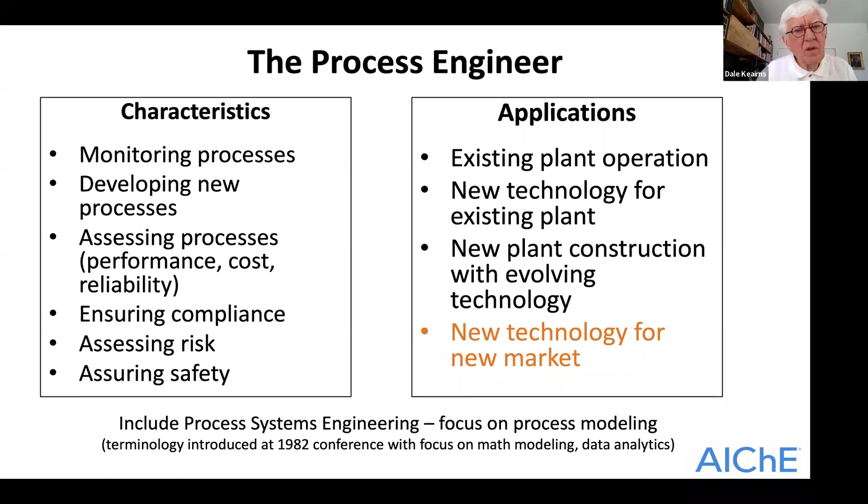And then the next visual. Can we go to the, thanks, Michelle.

So kind of some comments on the evolution of process boundaries. So on the left axis there, I have the scale, all the way from molecular, all the way to looking at global systems, and as a function of time. So back in 1900, AIChE was formed in 1908. And if you look at the presentations at that initial meeting, basically focused on equipment, what we now call unit operations as well. And that was the focus and the scope that we had at that time.

During the 1950s, the focus was really on the plant. In my undergraduate days, we used Max Peters' Plant Design and Economics for Chemical Engineers, a book from 1958. The inside figure when you opened that book was this plant, and the whole book focused on technical and economic analysis centered on the plant. Since that time, we've expanded the scope of where we draw process boundaries, so that we're now looking at everything from the micro, molecular level all the way up to enterprise systems and large, complicated systems.

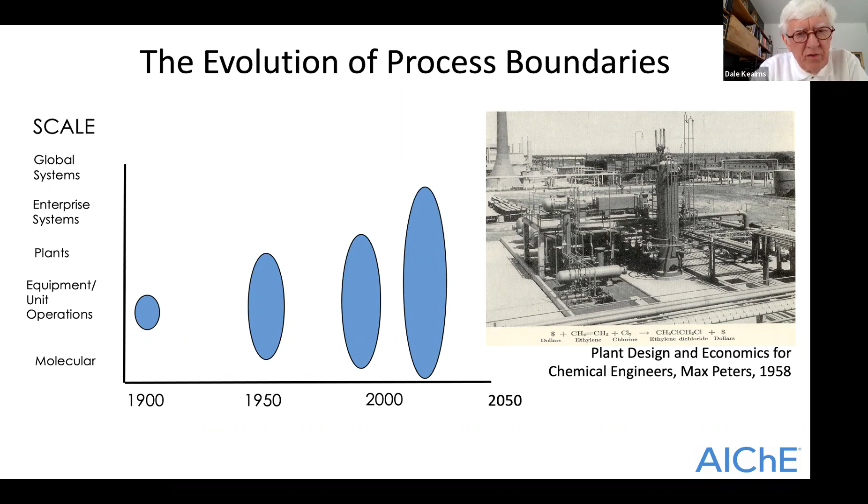If we go to the next visual, I had a couple examples, and there's a number we could pick. This happens to be on ice manufacturing, and I see this as an example of where we're responding to technology. This is ice production by time from about 1870 up to 1940. Between 1900 and 1920, there were about 25 million tons of natural ice still harvested, which was the primary source before that, and about the same amount produced as plant ice, manufactured ice. But there were a lot of considerations with weather, ice famines, and concerns with polluted lakes.

Ice from the Hudson River was really unsafe. The Natural Ice Association of America was formed during this time to promote the benefits of natural ice. You can go back and look at the literature, and think about the changes we're currently undergoing — we have the same kind of transitions occurring.

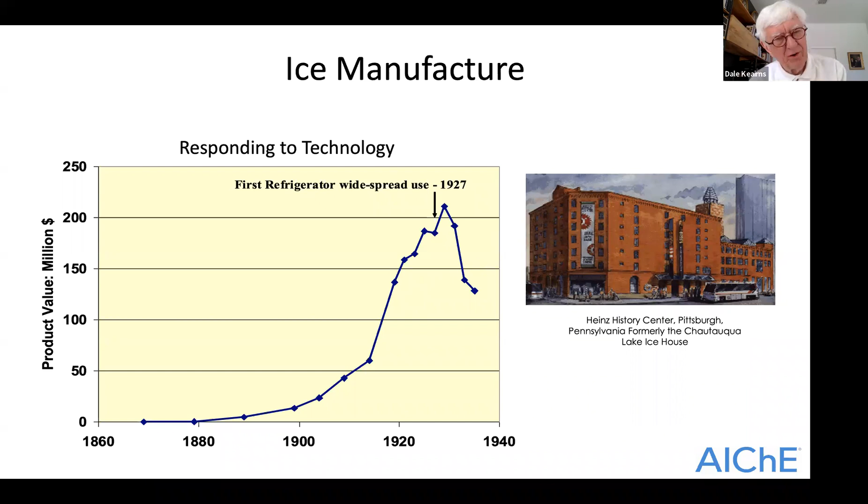If we go to the next visual, this is a case of refrigeration efficiency, where we're responding to regulations. I have three lines on this chart, with the time frame roughly 1950 to 2000. The green line is the refrigerator price, the blue line is the energy use per unit of cooling, and the red line is the refrigerator size in cubic feet.

In the early 1970s, we had regulations focused on driving improved refrigerator efficiency, and as a result, we see a significant reduction over time in energy use per unit. We also see that the price went down. One consideration we encounter today is people who resist regulations, arguing that environmental or other concerns will increase the price. That's not necessarily the situation, as we can see — yet the size of refrigerators continued to increase, and certainly didn't decrease as a result. I think it's another example of the role of technology and its connection to society and communities, which we'll talk about a bit later.

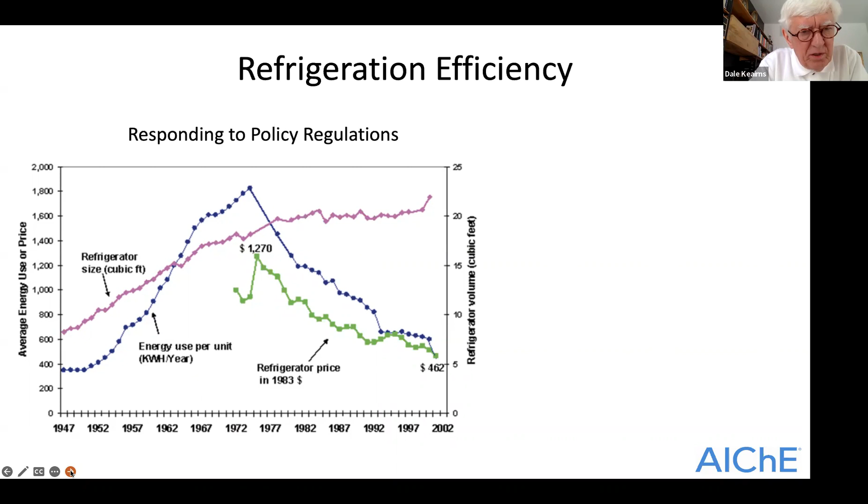The next visual illustrates what I see as one of the real challenges we have: the food challenge and responding to new paradigms. We have an enormous amount of wasted food, and what we call the food cold chain — pre-cooling, cold storage, refrigerated trucks, chilled market shelves, etc.

We really need to reinvent this, and it's going to require more than just refrigeration in this case. It's another example, and we have many of these types of examples that we're dealing with today. So these are just a couple of historical perspectives before we go into the other areas on the next slide.

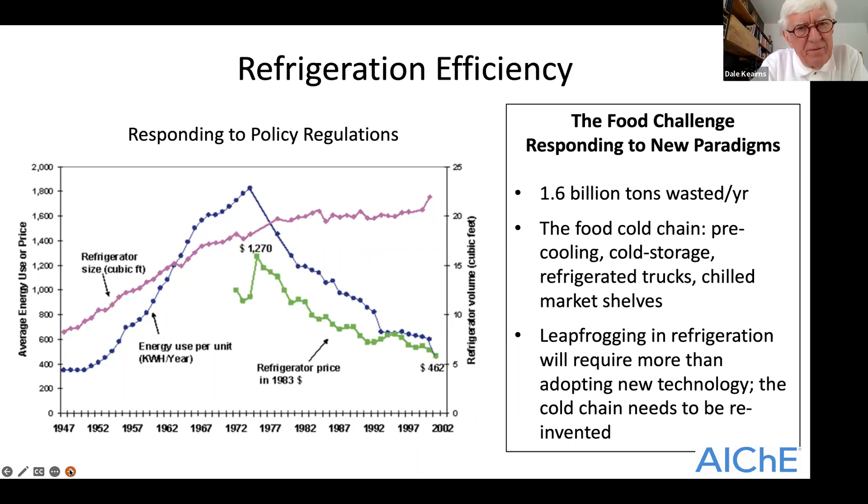Changed process boundaries. As I mentioned, originally we were in this blue box where we were largely, as chemical engineers, focused on process and product. We designed a plant, we built it, we operated it, a manufacturing process. But today we're really needing to deal with the whole integrated system: resources, the process, environmental, sustainability, societal, safety, infrastructure. And so the boundaries have changed over these 50, 60 years, if you will.

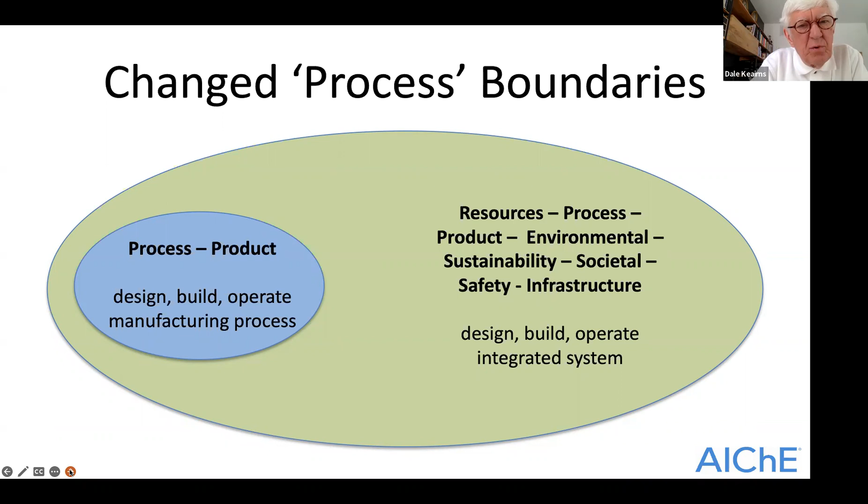The next visual then is looking at the components of this integrated system analysis. Certainly there's the technology, which is traditionally a focus that we've had. Resources have also been a focus for many of us. Materials, the supply chain, the workforce, the organization associated with those resources, the externalities, and the end user in the market.

If we go to the next visual, I want to then spend some time on techno-economic analysis, where we are really interested in looking at performance, capital cost, operating and maintenance cost, uncertainties, risks, and the time frame is important. And all of this is so important in terms of informing research and development and informing investments in technology.

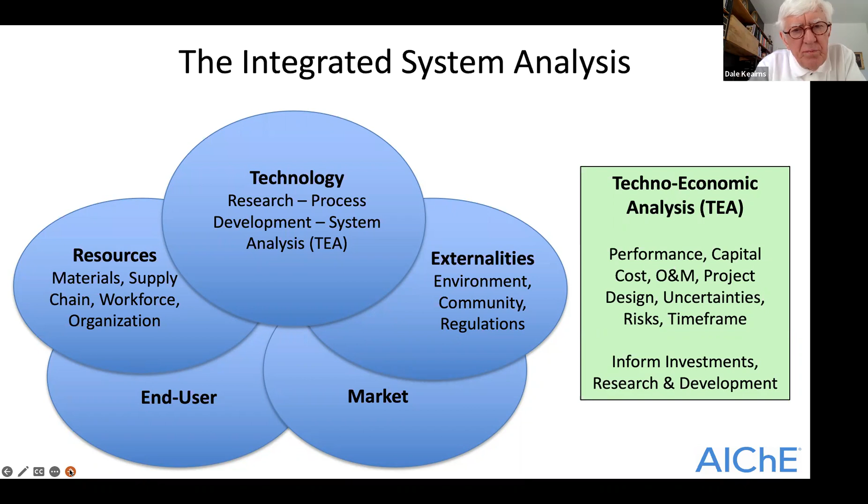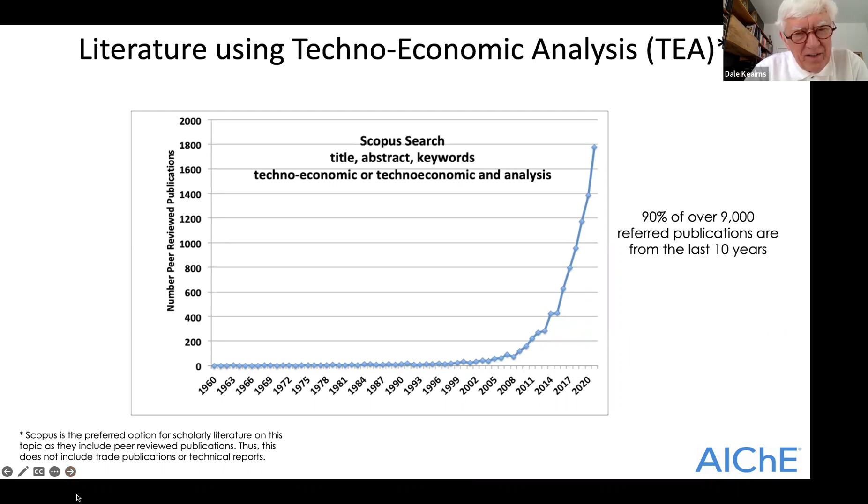Next visual. So technology maturity is extremely important, and many of you are engaged, I'm sure, with this whole space, and I welcome our exchanges on this. So there's technology readiness level, which is used, and many of you are very familiar with this ranking, all the way from a concept, TRL1, up to where a technology is commercial. But frequently, the system integration readiness level, and the interconnected readiness levels, are not really addressed effectively. And I consider these to be extremely important when we're looking at new systems.

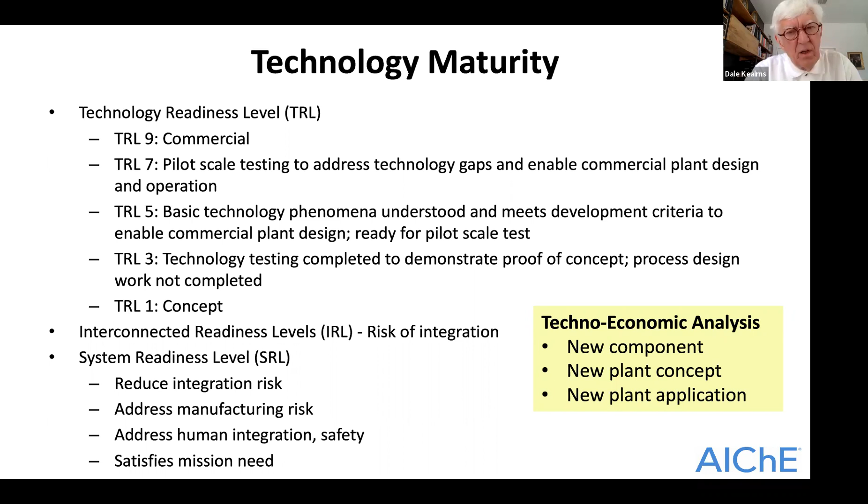And even if we're looking at a new component, many times the integration of that component into an existing plant or a new plant is not seriously considered. So there are techno-economic analyses for new components, for new plant concepts, and for a whole new application system, if you will. So if we go to the next slide, what I've done here is...

These are kind of the status, the understanding that we would have with the status of a technology. And they're sort of listed in the order from a concept level all the way to where we're interested in more of the commercial product, if you will. So, do we have test results? Do we have data analysis for this new technology, do they exist? And all of these are the things that are important in carrying out a techno-economic analysis.

Does an integrated process flow diagram exist? Frequently, we're presented with a cartoon of a simple box that assumes a great deal of assumptions in it. But eventually, we as process engineers are really engaged in putting together a process flow diagram. Does a process equipment and system configuration exist? One can have a flow diagram, but one really needs some configuration information. Are the interface requirements for a novel process defined? Do the novel equipment design concepts exist? Frequently, we have black boxes, but are very limited in terms of a design concept.

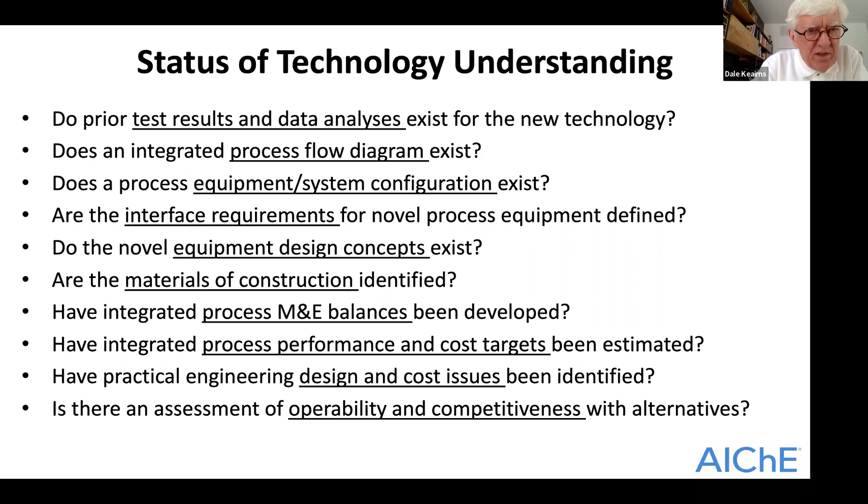One can do a techno-economic analysis with any of this level of information, but they are a very different techno-economic analysis. And what we see, and DOE has done this as well, we see guidelines for techno-economic analysis, but the guidelines are frequently for a quite mature technology where it's assumed that you have some test results, a process flow diagram, some equipment design, an application. But frequently we're dealing with a need to carry out this techno-economic analysis work to screen technologies at an early stage so that we can make decisions about whether we should continue investing in this or not. The next visual.

So this is just some comments on relevant boundaries. One can look at just a system component—a gas turbine, an automobile, EV vehicle, for example, or a building. One can also look at a collection of these energy system components. For example, natural gas being fed to a natural gas combined cycle plant with carbon capture, producing electricity. Or we can look at natural gas producing hydrogen fuel that goes to a charging station for an EV vehicle.

Energy system components and the supply chain to produce the components is another whole dimension. And again, do we look at the fate of those materials even later on? These dimensions are extremely important in life cycle analysis. If we're looking at the total life cycle from cradle to grave, we really have to be looking at a larger integrated system.

And then the system enterprise frequently needs to be addressed, where we're connecting energy systems. If we look at the electric grid today, tomorrow's electric grid is going to be radically different—a collection of very different energy systems. So we really need to be thinking about how we model and think about the overall enterprise.

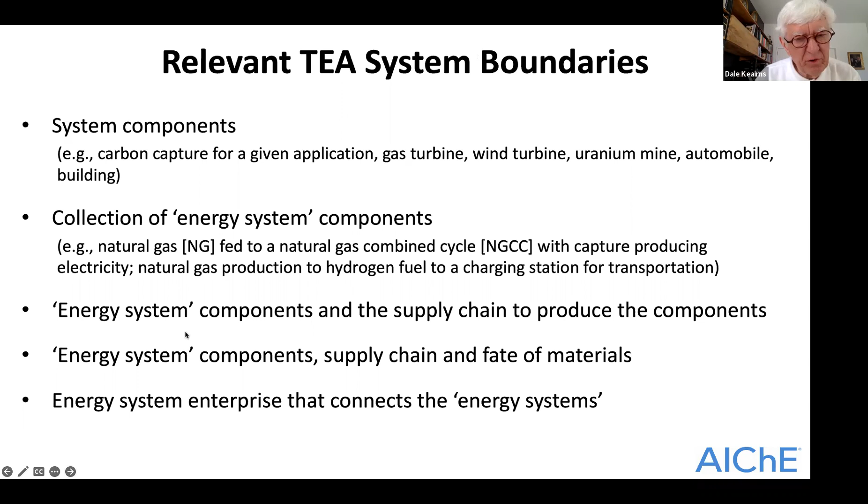The next visual. So, technology development clarity.

Extremely important: is the market application defined? Do we know the customers, the regulations, the scale, the environment? What is the boundary for the technology to be evaluated? It may just be a component with very few interfaces, or on the other hand, we may be looking at a very complicated integrated system. And is there a reference today—plant or component design performance is extremely important.

Candidate metrics—there's a whole list of metrics that are considered. I just list some here that we frequently engage with regularly: the state of the technology, the performance or cost improvements that can be achieved, the system integration, the complexity. There's a number of technologies proposed that technically can be made to work, but the complexity of the system makes the reliability and feasibility of a commercial system raise the question: do you want to take that risk?

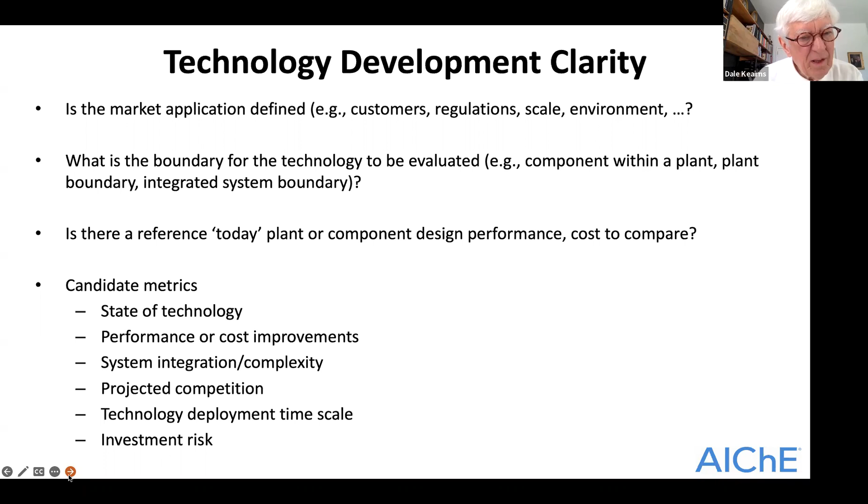So if we go to the next visual—this is, I think, my last slide—I just want to highlight that the process engineer's role, in my view, is essential if we're screening a new technology.

I'm talking here about a technology that may be in the range of technology readiness level 1 to 5, where we have a concept, or in the 3 to 5 range, we've done some experiments, we have some data and analysis. The objective is to identify the new process performance and cost.

We're really trying to identify at this stage what are the issues, where are the real challenges, where do we need to focus the effort going forward to address. This then informs the R&D priorities and informs what kind of investment one needs to project.

That then leads to, is it worth that investment? Because different problems, to solve, require different levels of investment and different experimental work or analysis work. So we can utilize techno-economic analysis and use our current technology understanding to address these issues and this need.

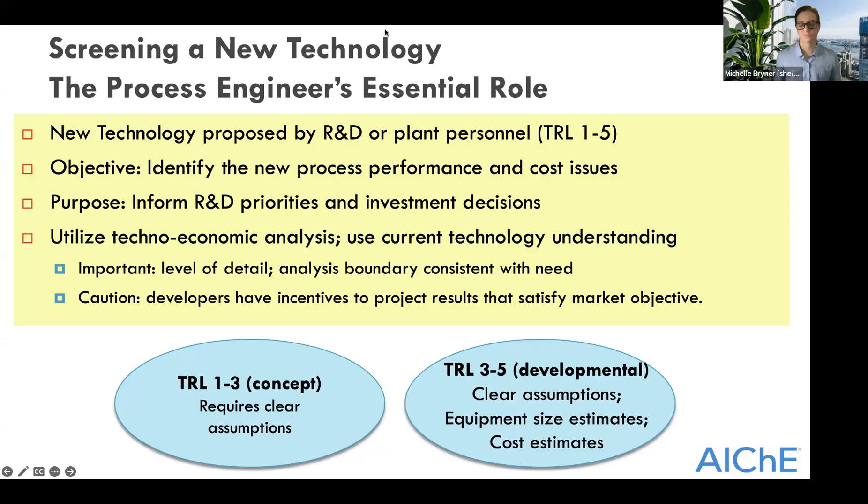No, I very much thank you for the opportunity and really welcomed our exchange here. And if there happen to be further follow-up questions or anything, I'm pleased to follow up and engage with anyone.

So thanks, Michelle, and thank you, Dale. Thanks, Scott, thanks a lot, Dale. Thank you. Thank you, great Dale, presentation. Thanks, Dale, it was a great presentation.